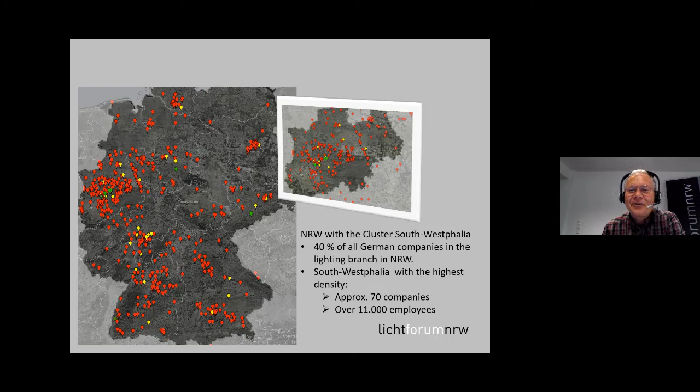So, thanks for the introduction, Arno, and a warm welcome from Lichtforum NRW. We are an initiative founded by regional lighting manufacturers and are based in the region of North Rhine-Westphalia with the highest density of companies working in the lighting branch. Our goal is to support the field wherever necessary, and today I would like to talk about the new regulations, which already produce many questions amongst the companies. As the wording is really very special in German, I'm afraid I cannot guarantee the correct English expressions.

In particular, it is these new regulations which can only be seen jointly. We from Lichtforum NRW would like to assist distributors of lighting products to apply these new regulations and to clarify points requiring deeper understanding. And for this, we initiated a working group consisting of manufacturers and experts to discuss open questions continuously. The regulations deal with both light sources and control gear. In this presentation, allow me to concentrate on light sources and luminaires only.

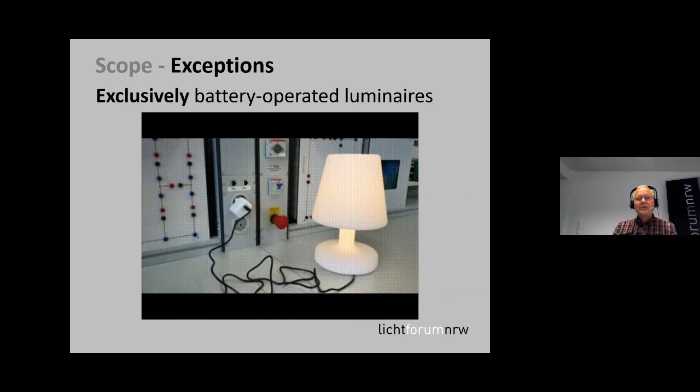Before we clarify what a light source is according to the regulation, let me talk about the exceptions. There is a list of light sources in displays, electronic displays, emergency lighting, solar lighting, bicycle lights, and many other exceptions too. But I would like to point out the case of exclusively battery operated luminaires. Say this table light is equipped with a USB socket for a charging plug. If it can light during charging, its light source falls under the scope of the regulation. But if a built-in switch cuts off the lighting during charging, it would then be considered as an exception.

And we have to get familiar with new terms. The lamp or LED module now is called a light source. I would say that shouldn't be a problem for us all. A bit more complicated is the wording containing product, which actually stands for the luminaire as we know it in the classical way. But nowadays, all sorts of products are equipped with LED, like shower heads, railings, furniture, and so on. And to cover all these new products, the expression containing product was introduced. If I happen to use the word luminaire, I certainly mean containing product.

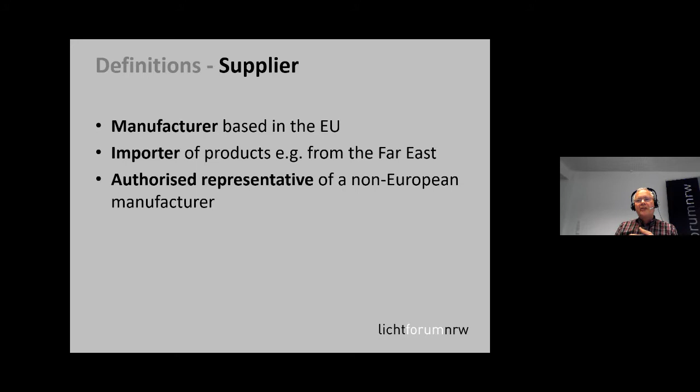If we want to know who is responsible for what, we have to sort out the different actors involved in the whole process, starting from the production to the sale at the end. A supplier, according to the regulation, can be a manufacturer based in the EU or an importer of products, for example, from the Far East, or an authorized representative of a non-European manufacturer who places the products on the EU market

instead. But please remember, placing on the market means making a product available in the EU market for the first time. Importing it alone doesn't mean that it has been placed on the market yet. The retailer is the classical seller. He sells, he markets the product to the end user. Both the supplier and the retailer have to know and follow the requirements of the regulations.

There are 3 deadlines we have to keep in mind. From the 1st of May on, information and parameters of a light source can be entered into the European product database EPREL, so that they are available on September 1st of this year at the latest. It should also be possible to generate energy efficiency labels for the registered light sources from May 1st onwards.

September 1st, 2021 is the most important deadline because that is the day the regulation comes into force with all its consequences. In a nutshell, first, the old energy labels displayed for lamps at the point of sale are to be replaced. Lamps with old labels on the packaging can be sold off. I heard something of a fortnight transition period, but I don't know this for sure. I will have to check this.

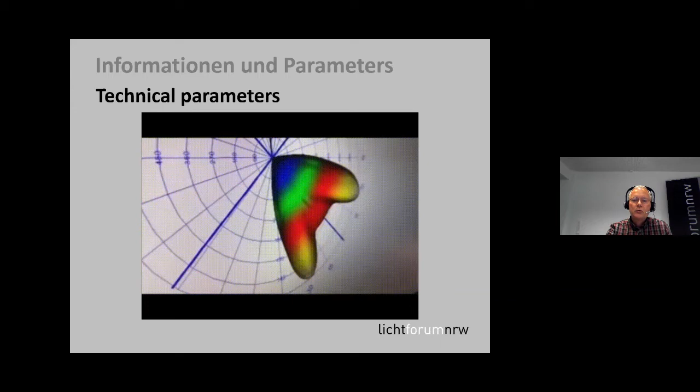For the next slides, I'd like to mention two more definitions. Information means all the notes on functionality and testing, whereas parameters stand for all technical values of a light source. These are different depending on whether we are talking about a containing product or a light source. We from Lichtforum NRW were able to measure these parameters in our own laboratories. So what does the supplier have to observe?

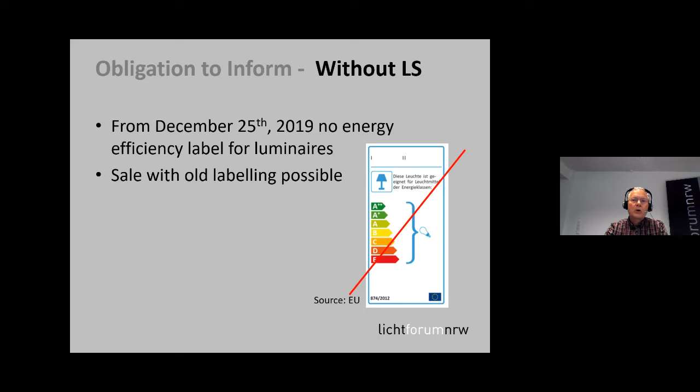As a supplier of luminaires, there are three different major cases with different requirements. Scenario 1. If you place a luminaire without a light source on the market, you can lean back. You have nothing to do with these regulations. From Christmas Day 2019 on, the energy label for luminaires was no longer required. You are allowed to sell off your products with the old label. Scenario 2. You place a luminaire on the market with an exchangeable light source.

Case 1. This light source is already available on the market. Then you only have to refer clearly to this in your technical documentation so that it can be found in EPREL. Case 2. Are you enclosing a light source which hasn't been placed on the market yet? For example, because you import this light source especially only for this luminaire, then you have to register the light source yourself in EPREL.

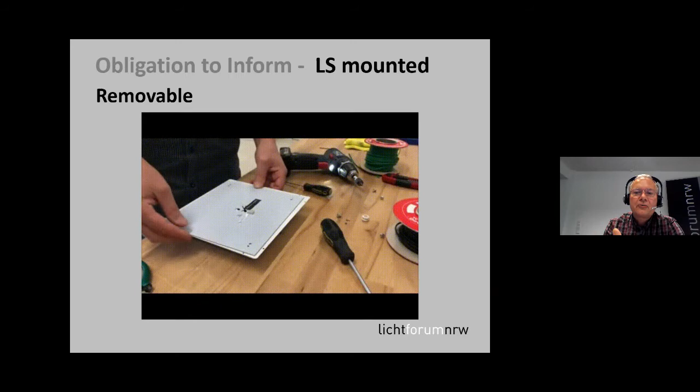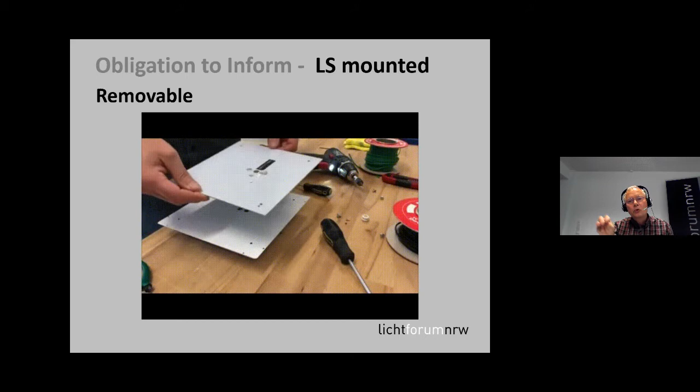Scenario 3, and now it's getting a bit more complicated. If you provide an integrated fixture with a mounted light source, usually LED, there are again two cases with different approaches. Case 1, the light source is removable for verification. This is now very important. This means it can be extracted from the containing product without the light source being damaged. Then it follows the way I mentioned before with the enclosed light source.

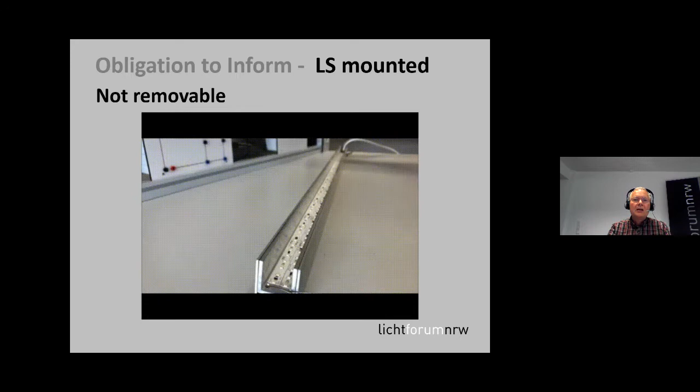Has it already been placed on the market? It has been registered in EPREL, and you only need to refer to this light source in your technical documentation. But are you placing this light source with the luminaire on the market for the first time? It is your task to register it in EPREL. Case 2. The light source is not removable for verification. Then the whole containing product will be regarded as a light source and has to be measured accordingly. This can be quite difficult, for instance, if you have long rails with sealed LED modules.

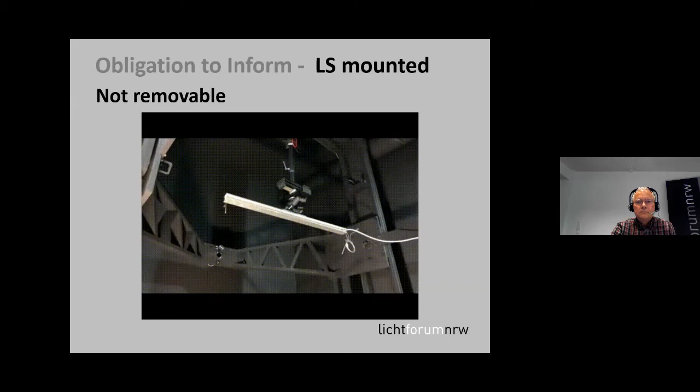But you, as a supplier, can determine the light source yourself. So perhaps the LED module is taped firmly into an aluminium profile, but the profile itself can be removed for verification. Then this profile can be regarded as a light source for a better result, maybe without a cover. If this element is used for different fixtures, it only has to be measured and registered once. And for the technical documentation, you only need to refer to this light source.

We are shifting now from removable to replaceable. Removable, that is what we learned before, means the light source can be removed for verification by the market surveillance without the light source being damaged. Replaceable, on the other hand, means a light source can be replaced by an end user or a qualified person with the use of commonly available tools without damaging the containing product.

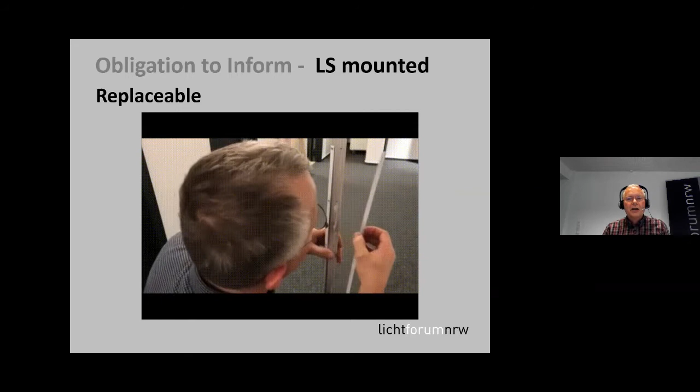So the qualified person is considered to be an electrician or service assistant in the field. But to tell you the truth, this is not particularly mentioned in the regulations. And we understand under commonly available tools everything you can get in a common hardware store, such as spanners, pliers, screwdrivers, and so on. But even a soldering iron you can get in a hardware store. But I wouldn't like to have an end user working with a soldering tool on my product.

To avoid electrical waste, the Ecodesign requirements expect the light sources to be replaceable. But there are certain reasons which may justify a non-replaceability. If, for example, the replacement could reduce the electrical safety, or if the protection against moisture is being harmed, or the thermal management. In this case, some more information has to be provided.

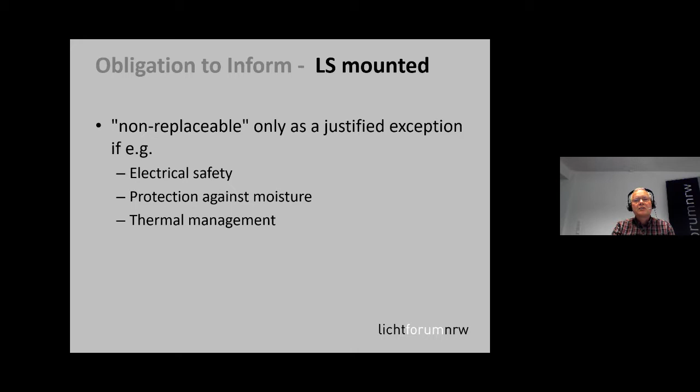So if the light source is not replaceable, the technical documentation has to provide reasons for this, and the website has to inform about the non-replaceability. If it is a consumer product, a B2C product, even the operating instructions must include this information, and the packaging of the luminaire must show at least the pictogram. Suggestions for pictograms are already available, for instance, from Lighting Europe. They are publishing it for a free download.

No matter if replaceable or not, the supplier of a containing product has to provide three kinds of basic information. First of all, information on the light source, which is included in the containing product, and its energy efficiency. This information has to be placed in the technical documentation, and it must be mentioned in the operating instructions by "this product contains a light source of energy efficiency class X." But according to an amendment, I happen to find a new deadline for this. It is the 1st of March 2022.

So if you download the regulation, you will not be sure if it's the latest version, because there are several amendments, corrections, and you have to really check out the website from the EU to find all these bits and pieces. The second basic information for containing products is how the light source can be removed for verification. And the third one is how the light source and the control gear can be separated from the containing product for an adequate recycling after the end of life.

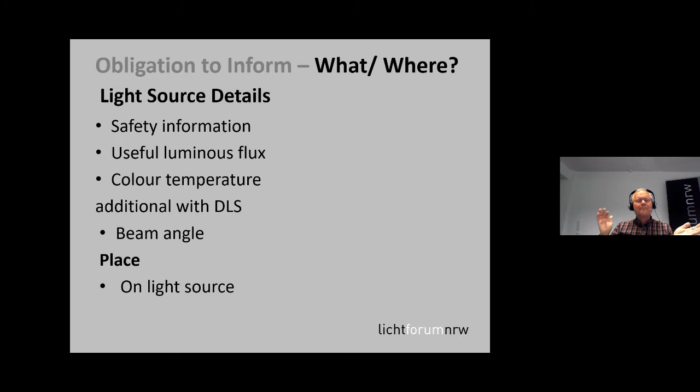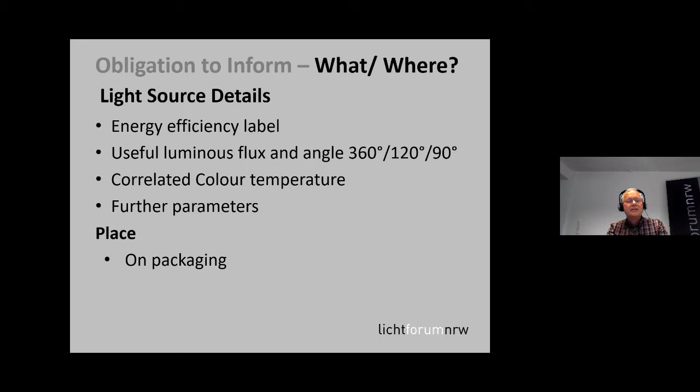So now let's jump from the luminaire to the light source, which itself is being placed on the market. Some information has to be placed directly on the light source itself. And besides necessary safety information, it is needed to mention the useful luminous flux, the color temperature, and additionally with directional light sources, also the beam angle, but all if there is enough space. Should the whole containing product be regarded as a light source, this information has to be displayed somewhere on the containing product. Furthermore, there are many technical parameters which have to be displayed on the light source's package. However, how and where is clearly defined in the regulation.

And now it's time for the retailer to act. Everywhere the light source is being marketed, no matter where, if in printed media, at the point of sale, or on online platforms, the energy efficiency class with its range has to be visible. And in TV spots, this even has to be communicated actively.

Coming now to the actual parameters, what has the supplier got to obey? So is everything that lights a light source according to the regulation? Of course not. Only when these criteria here are met, they fall under the scope. For example, color and output have to be in a specific range. Decorative lamps with an extra low output or professional floodlights could fall out of the scope.

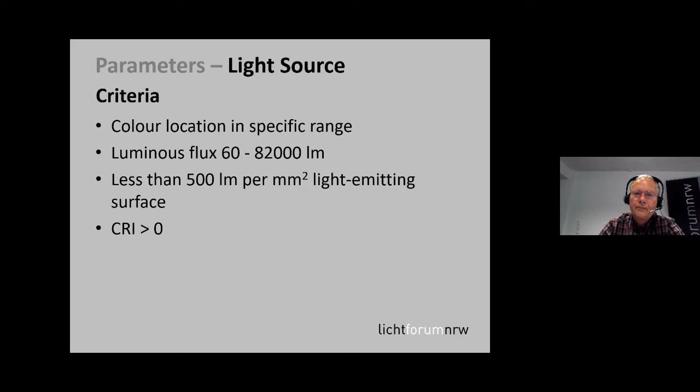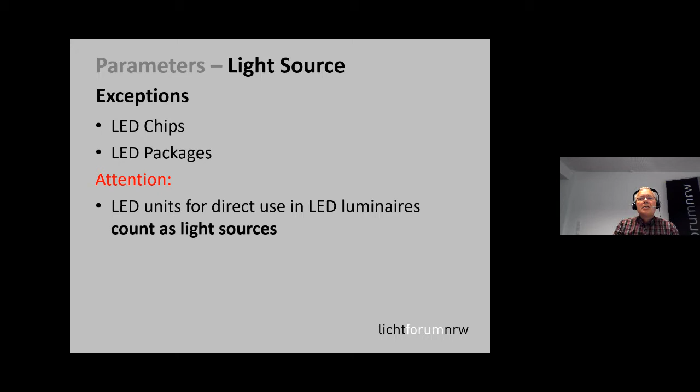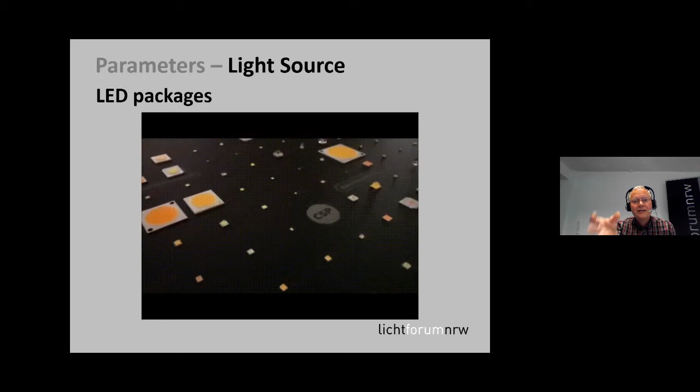And again, we have some exceptions. An LED chip, or so-called LED die, is the semiconductor part of an LED without optical elements or light converters. This is not a light source. An LED package, like a chip on board, normally isn't a light source either. But if this LED package is intended to be used directly in an LED luminaire, say a chip on board clamped down with a suitable device, it will definitely be considered a light source.

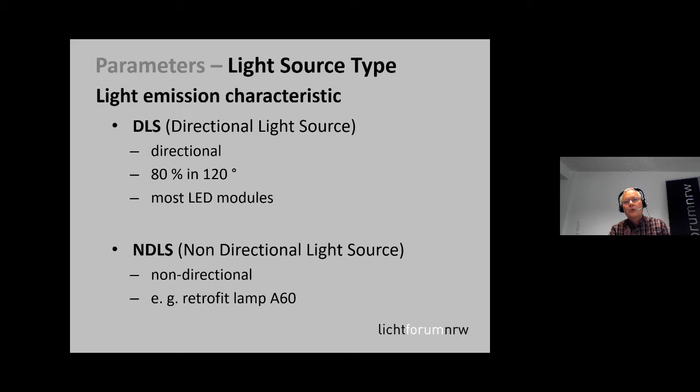The technical parameters depend on the type of light source. First criteria is the beam angle. If at least 80% of the total luminous flux is emitted within an angle of 120 degrees, we are talking about a directional light source, a DLS. This can be a reflector lamp or a flat LED module. Vice versa, everything else is an NDLS, a non-directional light source.

The second criteria is the supply voltage. Is the light source connected directly to the mains? We have a mains light source, MLS. This could be a retrofit lamp or a mains voltage LED module. But if it needs further equipment, such as a separate control gear to operate on the mains, we are talking about an NMLS, a non-mains light source.

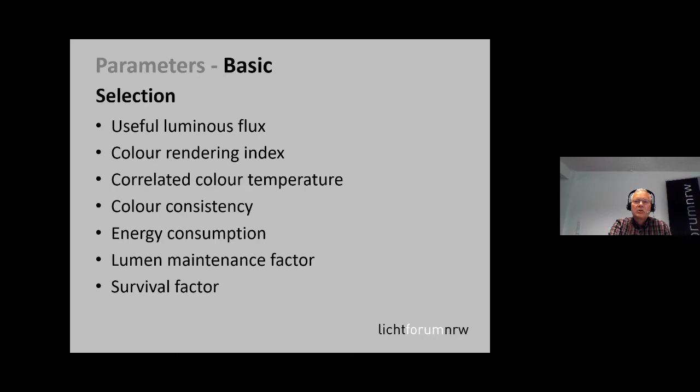There are further types of light sources, and I don't want to go into details here. You only find combinations of these criteria: directional on the mains or not, or non-directional light sources on the mains or not. These are some of the basic technical parameters which the supplier has to provide for his light source.

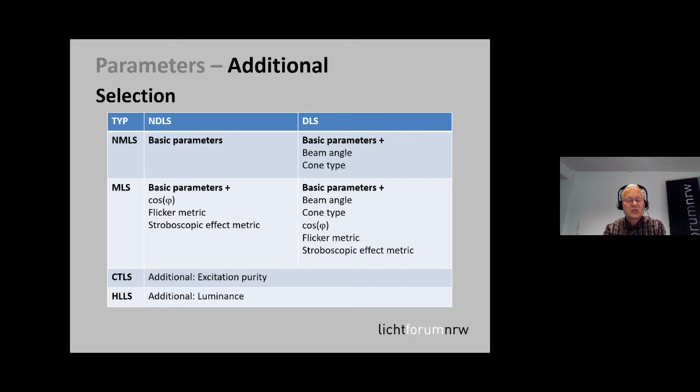Depending on the type of light source, there are additional parameters to be determined. With DLS, the beam angle is extremely important; with MLS, flicker and stroboscopic effects have to be checked. The Ecodesign regulation sets strict minimum requirements for the respective product.

Please be prepared that all of a sudden the market surveillance authorities knock on your door and would like to take a glance through your documentation. They will check all information and parameters the supplier made in the relevant places. It would be quite helpful if you could provide internal or external test reports to confirm your data.

Just remember, to remove a light source for verification, the luminaire, as we understand it, could be damaged as long as the light source keeps undamaged. Long LED modules could be shortened to approximately 50 centimeters or whatever size comes next. If not, it will be tested with the whole length.

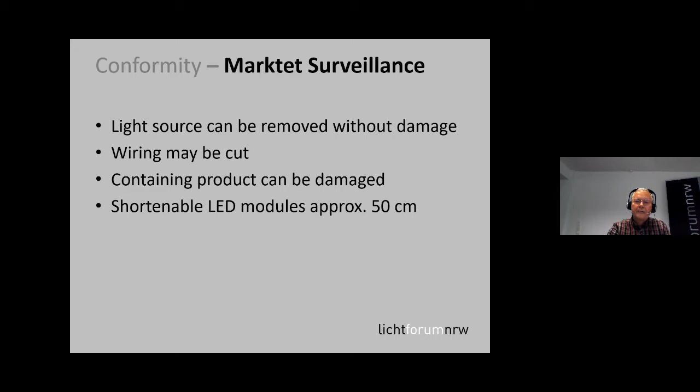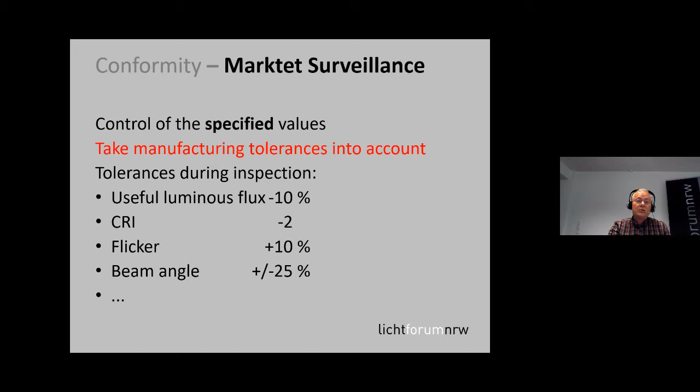The specified values will be checked and they should meet the verified results within a certain range. But if you specify the parameters of your light sources, please take tolerances into account. This could be really crucial. I hope I could give you a short overview. If you need any assistance, our labs and team colleagues are at your disposal. Thank you very much for your attention and stay healthy.

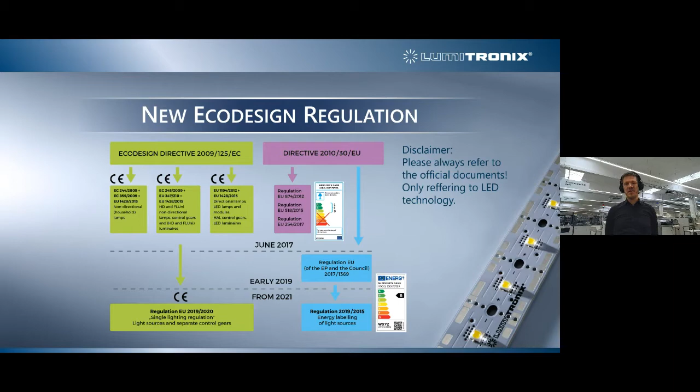So how and where to apply? As Ms. Stockton already said, the single lighting regulation makes things easy for the luminaire manufacturer if you understand how and where to apply it. The single lighting regulation divides between light sources, separate control gears, lighting control parts, and the containing product, which is the actual luminaire. The light sources have very difficult to understand and very deep technical requirements, how they should be developed, how they should be constructed to fulfill the requirements of the single lighting regulation.

And they also need to be labeled, and they need to be placed on the market, and there are a lot of information requirements which I will inform you later. For the separate control gear, there's only CE marking needed, but also quite strong technical requirements, which are difficult to fulfill. For lighting control parts, it is a little more difficult. They should be CE marked, but marketed only together with a light source or separate control gears.

For containing product manufacturers, that might be a luminaire, but that also might be some very different product containing a light source. This regulation makes things easy because you can mark your product only with a remark, this product contains a light source of energy efficiency class, whatever it is.

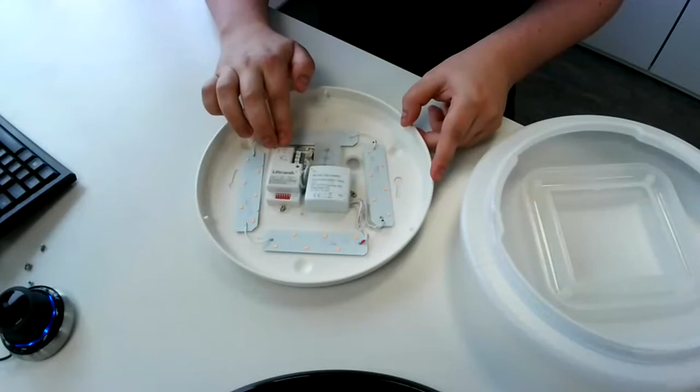This luminaire is a great example on how to differentiate between the separate components. At first, we see this is the whole containing product. We can remove from the containing product 2 separate diffusion layers. After those diffusion layers, we see the remaining components, which are a separate control gear or power supply. The purpose of this is to reduce mains AC voltage down to a lower DC voltage.

Behind the separate control gear is a lighting control. The purpose of the lighting control is to enable functionality like dimming or also smart connectivity. And in the end, there is the light source itself, which will brighten your day. After we have now seen the luminaire and how it is contained in separate components, let me switch back to my presentation.

We have first seen that we have a containing product. The containing product contains a light source, a lighting control part, and a separate control gear. If we apply the old lighting regulation, this product combined has an energy efficiency of 65 lumens per watt and therefore will reach an okayish A in the old energy efficiency class. However, if you apply the new single lighting regulation without any changes, you will get a measly G. Actually, this product is close to not being able to be sold at all.

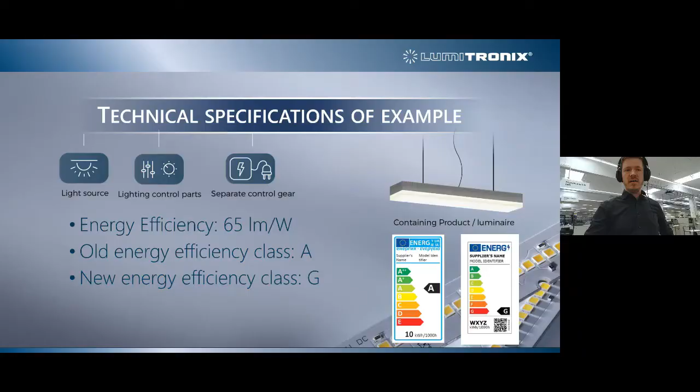Thank you very much for your practical insights. I think it's very important and very good to see these technical specifications. And I will jump into the technical requirements of the energy efficiency of the light source. Just a moment, I have to switch the screen. Okay.

Then there's the loss factor, which differentiates different light source types. But since we are focusing only on LEDs, this is a constant number of 1.5 for LEDs. The useful luminous flux is the luminous flux of the light source, which is within the directivity defined for the light source.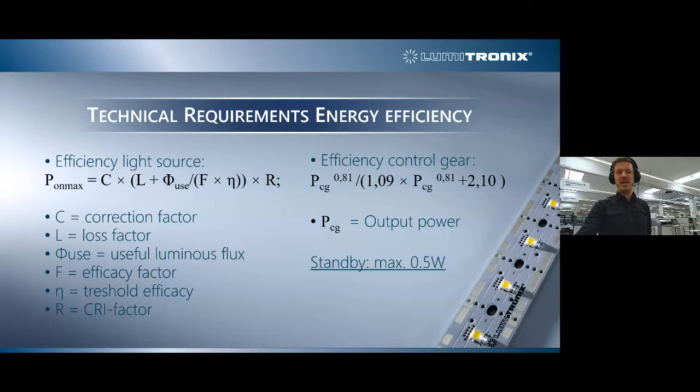Okay, I have stopped at the color consistency, which is measured in MacAdam steps. Also over here, there's a low requirement of 7 MacAdam steps minimum, which needs to be fulfilled, which I think is very easy to fulfill. Then there's also a requirement for flicker and stroboscopic effect, which has to be fulfilled.

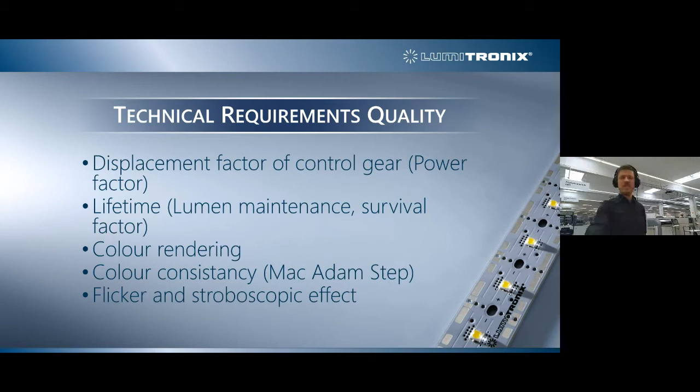What is very important and in my opinion also very difficult to fulfill is the new information requirements, because on the product, that means on the light source itself and also on control gears, there needs to be very specific information. On the packaging, there's a whole bunch of specifications which need to be printed. For control gears, this information also needs to be published on a free access website.

There's a very specific form of your datasheet and technical documentation which you need to fulfill for light sources and also for control gears. And what is quite tricky at the moment is that you'll need to publish all your products, if you're producing a light source, on the European product database, which is not perfectly working at the moment, which makes it a little tricky, but I assume it will be fine within the next weeks or months.

If you are a luminaire manufacturer, then most of these requirements do not interest you at all, because you only need to print on your product, on your luminaire packaging: This product contains a light source of energy efficiency class X. Only control gear producers and producers of light sources have to fulfill all these very difficult technical requirements.

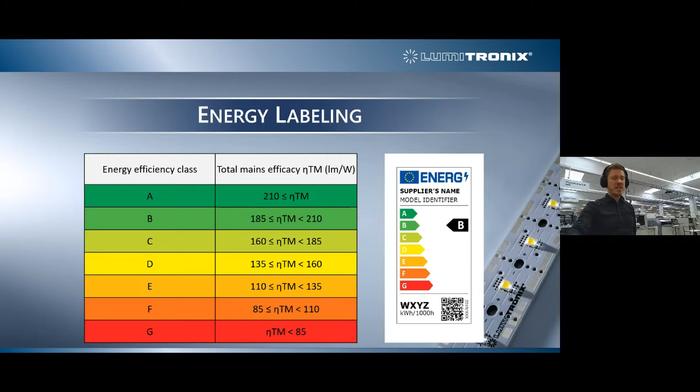Okay, so thank you very much. I'll give over to the practical demonstration of Volker again, and hopefully we'll manage with the presentation better than before. Thank you very much, Paul.

After these technical details, I would like to again show you the luminaire we have taken a closer look at before, and tell you how to specify it in a way where you do not have to declare the whole luminaire, but only the light source in it. As we've seen before, this containing product has two diffusion layers. Both of these diffusion layers will absorb light and therefore will worsen your energy efficiency rating. There's also the separate control gear and the lighting control, which will also worsen your energy efficiency rating.

However, if you take care when designing your luminaire, it is sufficient to just declare the energy efficiency of the containing light source. In order to be able to do this, the light source itself needs to be removable. Removable means that the light source can be extracted by a supervising party in order to make sure it really is as specified. But being able to remove the light source does not mean that everybody has to be able to extract it with a Phillips screwdriver and then place it back. It is totally sufficient if the containing product gets destroyed while removing the light source, as long as the light source itself is not destroyed.

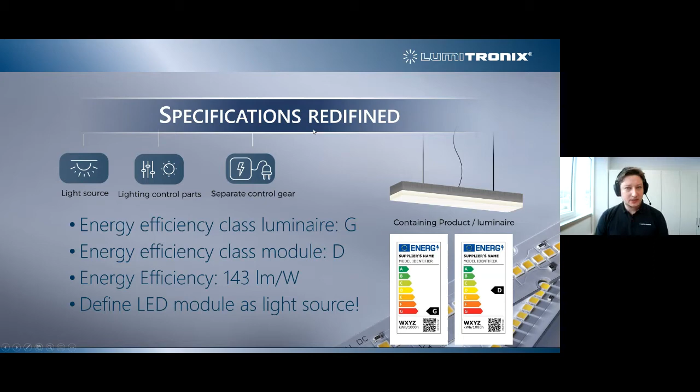But what if you are not satisfied with energy efficiency class D? After all, this webinar is called How to Achieve A. There are a couple of ways to achieve this, and Lumitronix will help you with this. The first step to achieving an energy efficiency class of A is to separate the light source from the surrounding product, as we have seen before. And then you will have to change the LEDs contained in your product.

And with this, it is okay that you add a very efficient 4000 or 5000 Kelvin LED as a second one and define this as the default operation mode, which will be used to specify the energy efficiency class of your containing light source. With these tips at hand, I would like to hand back to Paul.

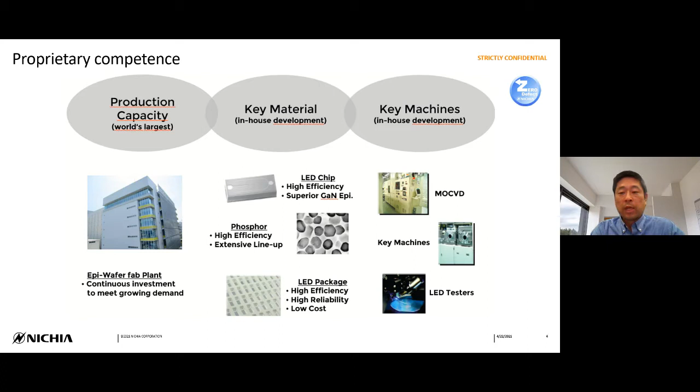Nichia has 3 unique competencies. The first one is the world's largest production capacity. You can see one of our buildings here on the left side. And the second one is in-house developed key materials, such as LED chip, phosphor, and LED package. The third one is in-house developed key machines. This makes Nichia sustainable and a unique position.

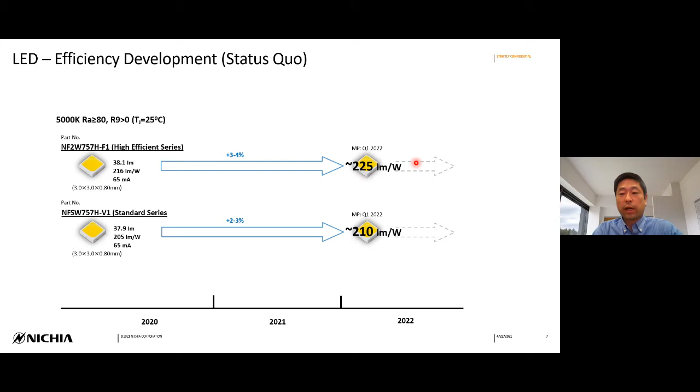Can LED help only efficacy? I do not think so. LED has more capability. LED adoption to the lighting industry began from energy savings here, which is mass replacement of bulbs and fluorescent lamps. Then CSP style LEDs, we call it direct mountable chip, support easier design and create new design.

Then phosphor technology with cutting edge technology supports quality of light, such as high CRI, which I am giving you updates on later. Then Nichia is stepping into human-centric light as the new feature. Healthier life by lighting would create a more ecological world with fewer patients in hospital.

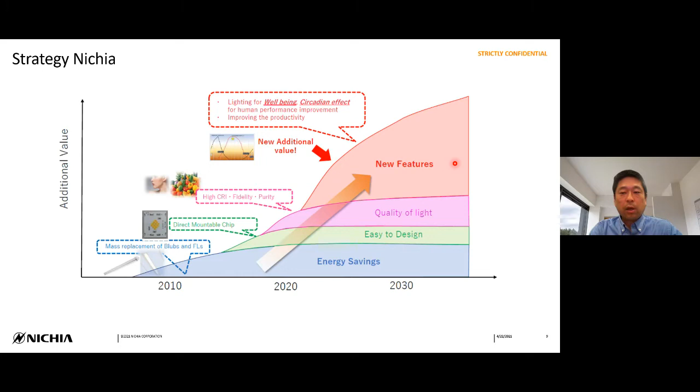But the new H6 LED is changing the game. This new H6 LED has the same efficacy as 80 CRI, besides a superior quality of color rendering index, which is more than 90 CRI. This H6 technology would help Ecodesign and the lighting industry in terms of the very good efficacy and the quality of light.

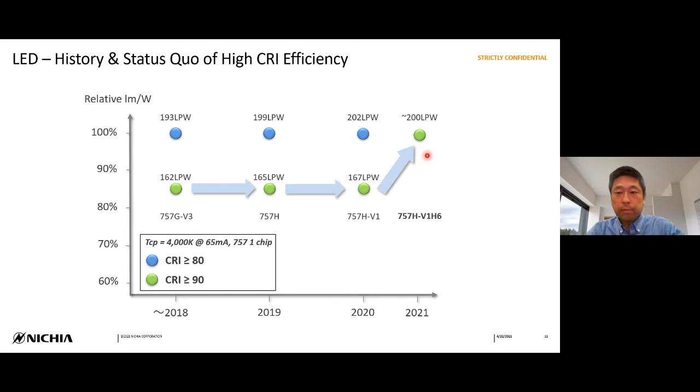Now, we are moving on to how LED can affect the health of humans. White LEDs generally consist of a blue light source with a layer of phosphor on top, and these combine to make white light. They do not usually provide a strong cyan component in their spectrum, because this comes at a cost in terms of luminous efficacy. So this cyan region drops the efficacy. This means standard LEDs struggle to provide truly human-centric solutions that stimulate the human body.

Vitasolis technology enables users to benefit from both the energy savings of LED and the advantage of human-centric lighting. Its rich cyan component gives you vitality, while LED efficacy is still high enough. If you multiply the melanopic ratio, which connects to the cyan components, and the lumens per watt efficacy, Vitasolis comes out on top over conventional LEDs. So Vitasolis is giving you both good efficacy and good melanopic ratio.

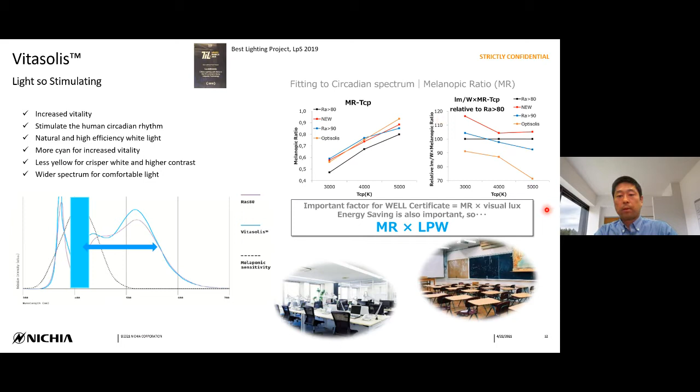This is also another new technology, the innovative 2-in-1 tunable white. Mid-power LED enables luminaire manufacturers to improve color tuning, shrink optics and fixture profiles, while enabling new design options. This is the industry's first tunable white LED in a mid-power 3030 package with a single light emitting surface. Targeting most lighting applications, the technology provides luminaire manufacturers with a host of benefits ranging from new technology and design features to improved factory operations and inventory positions.

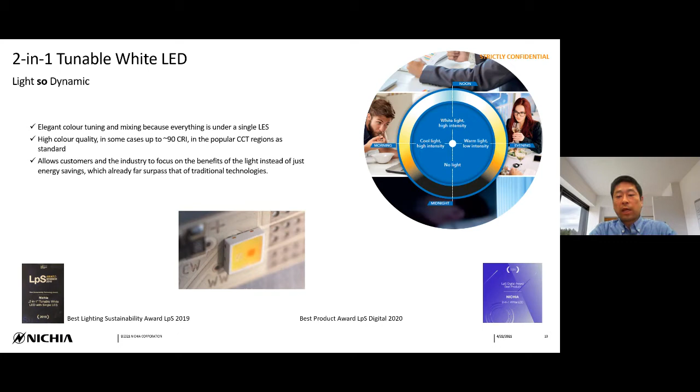Nichia's proprietary 2-in-1 LED technology also allows for higher color quality, in some cases up to 90 CRI in the popular CCT regions as standard, achieved with negligible loss of performance versus standard CRI LEDs. This technology allows customers and the industry to focus on the benefits of the light instead of just energy savings, which already far surpass that of traditional technologies.

This is compared to the traditional LEDs, here, and the new technology, 2-in-1 3030 LEDs. So as you can see, two colors are in one single emission, which can change the style or the size of the fixtures. As you can imagine, these 2-in-1 LEDs allow the reduction of the light guide mixing area here, a shorter optical distance like this, a simplified PCB design like this, and a thinner edge of the fixture that creates a totally smaller size of the luminaires.

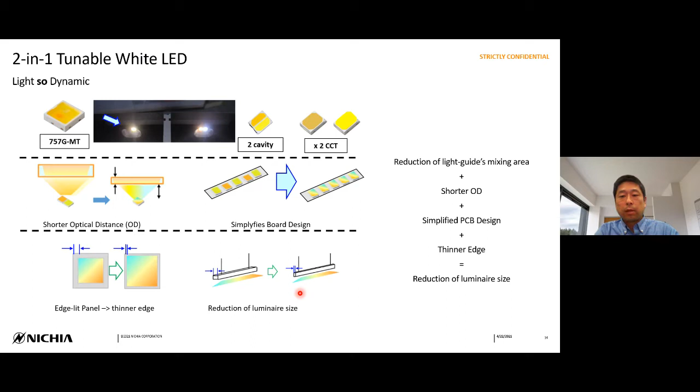So both new technologies, Vitasolis and the 2-in-1 tunable white, are included in Nichia's Light So Good motto. We at Nichia would like to support eco-design and our lighting industry with our unique technologies. Thank you very much.

Thank you, Kai, for your interesting speech and for giving us insight into the options for how Nichia can assist lighting manufacturers with their products in achieving good business.

So the next presenter: it's a joint lecture from the Fraunhofer IBP team, authored by Daniel Neves-Pimenta, Daniel Wehner, and Robert Ilg. This lecture will be presented by Daniel Neves-Pimenta and Daniel Wehner. It's about a holistic approach for dealing with the Ecodesign directive in lighting. The focus is on getting the complexity under control.

Daniel Neves-Pimenta is Product and Business Development Manager, gained experience at Danish architects, was fascinated by the potential of LEDs and therefore worked for renowned companies like Nimbus and XAL. At the Fraunhofer Institute, he researches the future of the lighting industry and mass personalization. Daniel Wehner, also Business Development Manager, graduated from Nuremberg Technology and the University of Stuttgart, holding a doctorate in environmental engineering. He leads the development of data science, product stewardship, and corporate sustainability solutions.

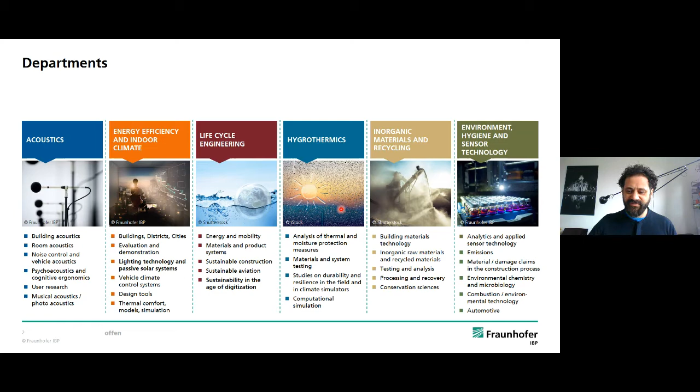So when I was asked to have a contribution to this Ecodesign webinar, we were a bit slow or critical in it, but Paul was like, we need to have some critical appointments on this stuff, and I thought, okay, that might be a good position for us. And on social media, I found this very interesting post that I'm showing here.

So this shows a situation in London from 1851, and you can see some funny objects on the facade, which are there to bring daylight into the building. So this is a small note from a newspaper. No less than 50,000 reflectors of this firm's manufacture have been fixed in London alone, and this was in 1851, so almost 170 years ago. People were really thinking of how to use daylight in buildings.

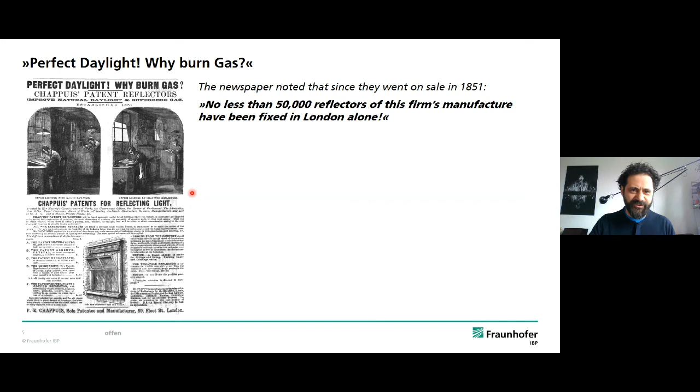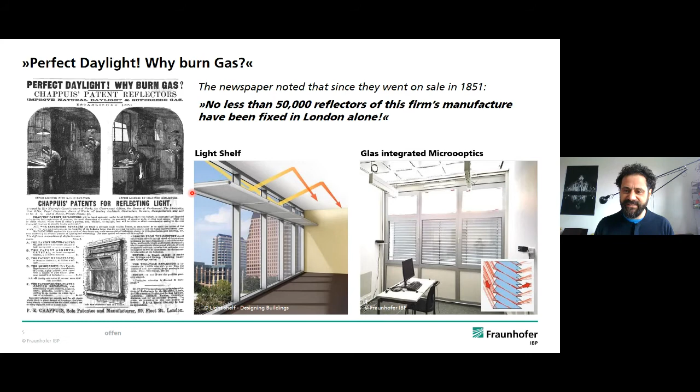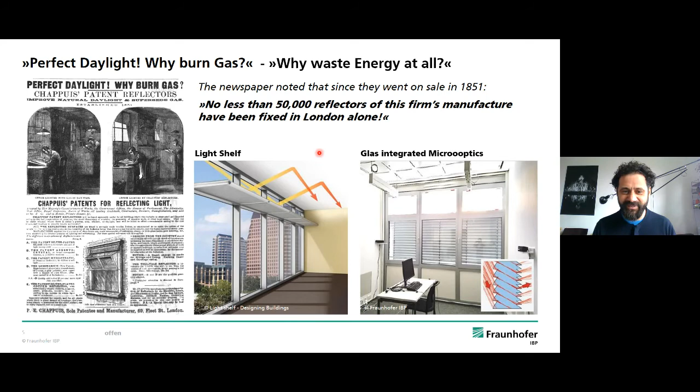I think this is a very nice claim: perfect daylight, why burn gas? So up till now, there are technologies that try to really bring daylighting into the buildings. We are also working on these issues and have mounted these special glasses you see on the right side with some integrated micro-optics to really bring daylight into the room and throw it up to the ceiling to have more usage of the daylight. So if we want to be critical on this, we can say, why waste energy at all if we can have sunlight? Of course, this is hard to integrate into this directive.

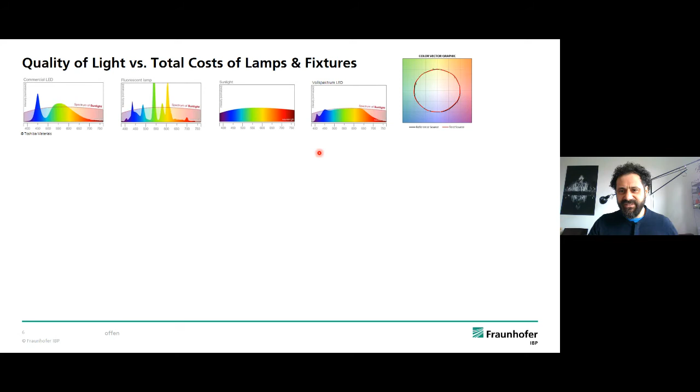Another aspect that Kei-san already mentioned is that this directive is really focusing very strongly on aspects like energy efficacy, of course. But it's not only flicker that is necessary for people. It's also necessary to have a very good spectrum, and not only CRI, but maybe also the gamut and stuff that is also happening at the moment. But this directive is really focusing on the hard facts.

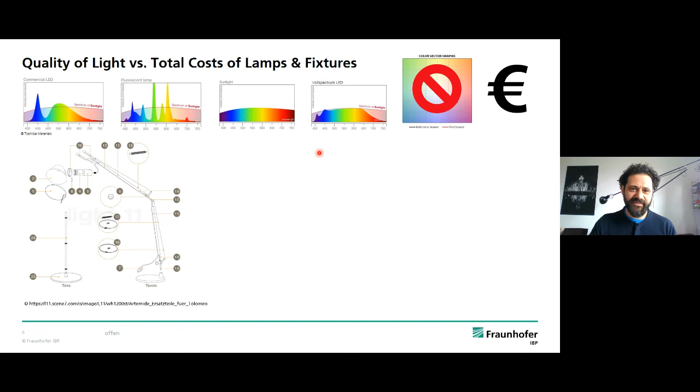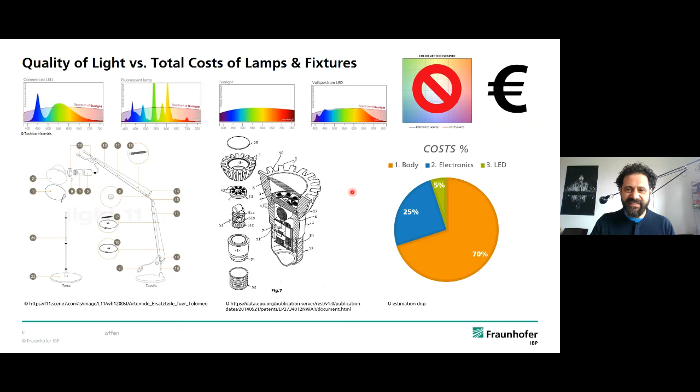Usually when it comes to fixtures, it's always a price issue. And if we take a look at the total cost of lamps and fixtures, there are many body parts, there are many complex parts, there's electronics and stuff. So I might say, as a small estimation, less than 5% maybe are really the costs that go into the LED. So it's a bit ridiculous to be always focusing on aspects like money and energy if we really have many more aspects to cover.

Of course, the energy label is focusing on energy, and this is a right thing to do, because these are some numbers from Repro-Light. We see that the consumption is really 99% in the use phase of the fixtures. So the production phase also is using a bit of energy, but we see that if we run the fixtures, that is where the energy really goes. So it's necessary to take a look at that.

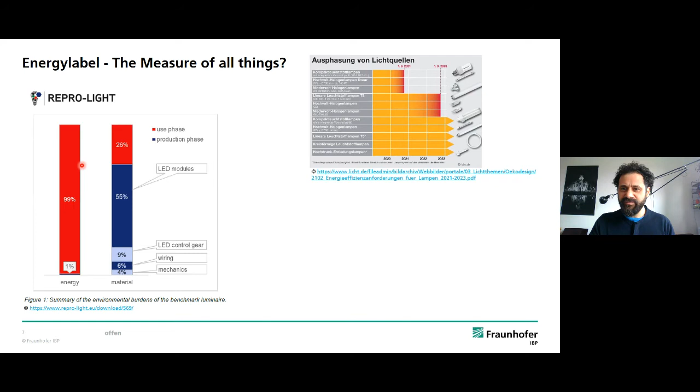Also, we are happy that some of the older technologies are slowly being phased out. This may be hard for some designer fixtures, but maybe there will be some retrofits to allow them to light. We already had a view on the energy label. We also think this is maybe bringing a bit of confusion to the customers. It's really hard already for the fixture manufacturers to know if they should put the label on their fixture or on the lighting engine and stuff. But maybe the next generation will understand it.

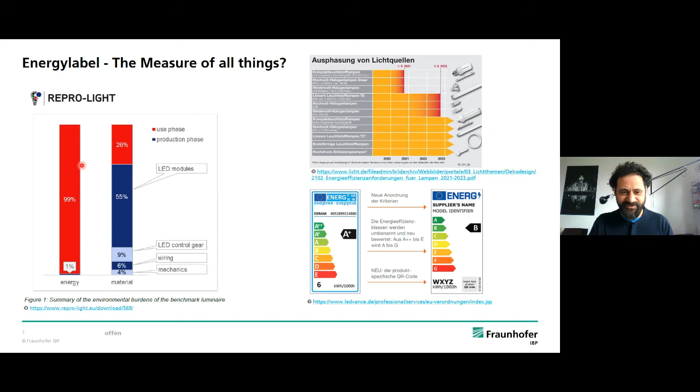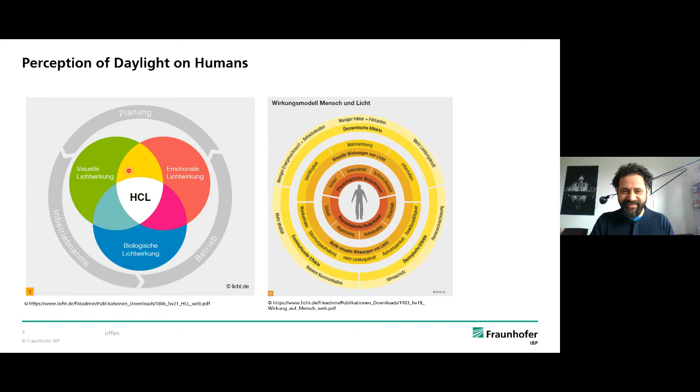Another aspect that is a bit weak: as Kai Haraguchi already said, the perception of daylight on humans, or even the perception of artificial lighting, is growing strong. So visual and emotional and also biological aspects are not addressed in the directive. And we know that it's not only physical, but also psychological aspects that lighting brings to us. And although there might not be the final proof, I think everyone can agree that lighting is very important to all this stuff.

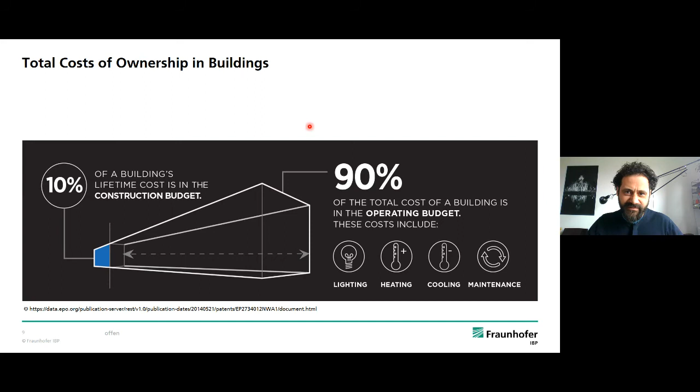So back to total cost of ownership in buildings. This figure, maybe people might know it. So 10% of building costs are in the construction, and then 90% of the costs are really in the operation of the building. And this is right, and I think this is also the aspect where the energy directive tries to help.

But there's one more thing, because there are users inside the building, and these users are, let's say, the main personnel or the main cost aspect. And if we do not look at this, you see these numbers here: they show that almost 100% after 30 years of the building are personnel costs and the salaries of the people.

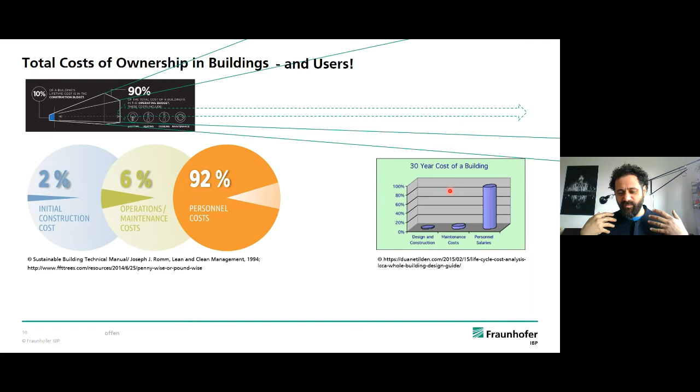And if we do not look at this efficacy there, if people are not working well, they might lose much more energy and bring a really worse efficacy. And we also think that this directive is quite a complex thing to do, and all the lighting companies, fixture companies are striving to bring it to life.

And this is where we are trying to bring some help in the next slides. And this is where we'll pass over to Daniel Wehner to give his view on a holistic eco-design approach, which is required.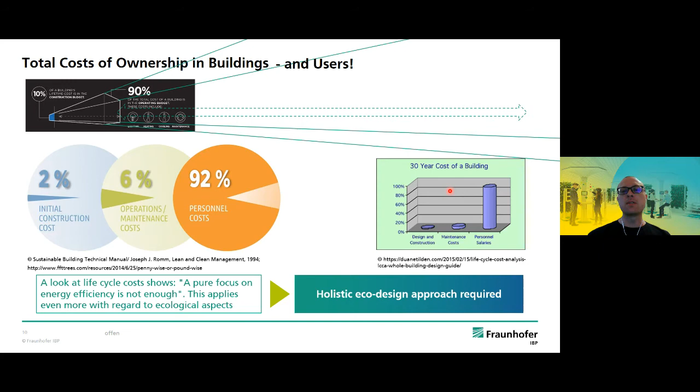Okay, thank you, Daniel, for your very interesting insight into life cycle costs of lighting. And on the next slide, we will see that as for the costs, also sustainability is about a whole lot more than just energy efficiency in use. In fact, really a lot more, so much that at the first glance, it might seem overwhelmingly complex, especially if you look at all these indicators that are around and have to commonly comply with.

There are many indicators, not only regarding different effects you have on the environment, like global warming, water depletion, or biodiversity loss. Also, each of these indicators has different computational models behind it and methods you would have to follow. And if you're a bit familiar with this topic, you will also know there are different scopes that are sometimes required from you to deliver, like cradle to gate or cradle to grave or scope 1, 2, 3. If you know these terms, then you also know very often it is not only about what happens in your company, but also what happens outside in your supply chain or downstream at the users of your products, or even at the end of life.

And sure, it's understandable if you say, already this Ecodesign directive is so difficult to get your head around at the moment. You don't really see a way to go beyond this scope right now. But we think you should really ask yourself whether you want to continue to muddle through and be overwhelmed by the next environmental regulation you are most likely going to face in the future. Many of these regulations are already around. Maybe you don't have to comply with them now, but it is very likely you will have to comply with more life cycle related regulations in the future.

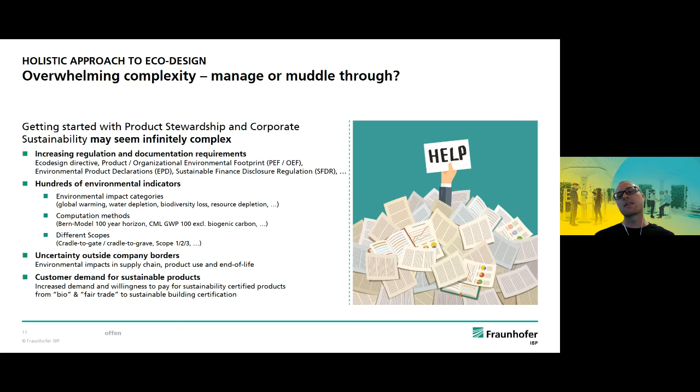Or do you really want to take this as a starting point and follow a more holistic approach to product stewardship and corporate sustainability, and tap also into the value of sustainability, become a leader in the field, and make a profit out of it? And the good news on the next slide is that it's actually easier than you may think to get started with a holistic eco-design approach, as you can benefit from the experience and lessons learned from many thousand companies all around the world in the last decades, where we can clearly see that basically it is about 3 key capacities you need to build up in order to have a solid, robust eco-design approach.

First, of course, we also heard about this a lot today. You need to understand your stakeholders, which are most of all the users of your light. It needs to suit them, but your stakeholders are for sure also the legislators, your investors, and some more you need to take into account. So this is, I think, very basic for any great product. If it comes to capacity to comply with today's and future regulations, then life cycle assessment capacity will be a very important pillar of your portfolio in terms of competence to run such analysis, as well as the data you need for it.

This is important for you in two ways. On the one hand, with having the data and the methods at hand, you will be ready to compute all the different environmental indicators that you will probably have to comply with in the future. And on the other hand, understanding the environmental hotspots around the life cycle of your products will give you a very good understanding where the problems are and where probably new technical regulations will be enforced in the future, because legislators usually also back up their decisions with such life cycle analysis.

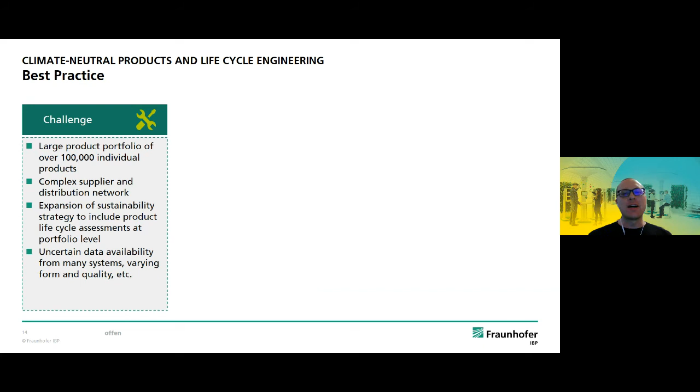Thanks, Daniel. You can see how a typical approach looks like. You can just open the whole slide to the three pillars, Daniel. We don't need to go too much into detail of this kind of project collaboration. I only want to point out a few things.

It's very common for us that we have to work with a very large product portfolio, sometimes with more than 100,000 different individual products. And we're also used to the database, the in-house data you have about your products, being incomplete with regard to life cycle assessment. This is not so much a problem for us. In order to keep things lean, you and we want to work with what is at hand and try not to go into extra data collection, because if you do it now, in the future you will have to do it again, and that will cause a lot of effort you would want to avoid.

On the other hand, with the experience we have from hundreds of different projects in different industries, we usually can figure out quite well which of your data gaps are actually important. And if we find an important data gap, we usually also have experience and data behind to at least narrow down the uncertainty and still get to robust results.

As a result, you can get insights about your product portfolio. But if you want to go further, we also provide automated workflows, components for automated workflows, or simple to use dashboard tools tailored to specific tasks and roles in your company.

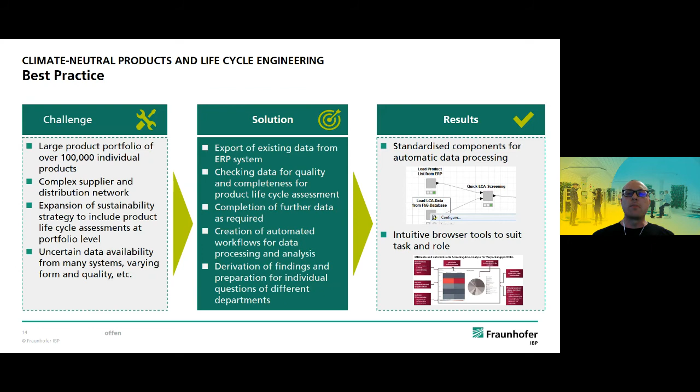Last but not least, I want to welcome you to get in touch with us and benefit from our interdisciplinary expertise for holistic eco-design in lighting. I think a major benefit is that we do not only have experts in sustainability and data engineering, but also have technical experts in lighting in our institute. So this would guarantee a very smooth and effective cooperation,

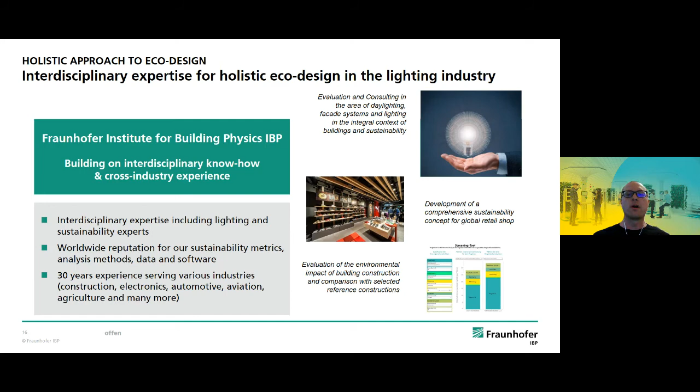regardless if it is a technical optimization project you would be looking for, for example finding integrated solutions for artificial and daylight use, or whether it's more about taking a customer focus and optimizing the user experience through lighting in a shop, for example, or whether it is to build up product stewardship capacity in your company. And with this, I would like to say thank you to all of you for joining our presentation. I'd be very happy to hear from you and maybe get in touch after this webinar. Thank you.

Thank you, Daniel and Robert. I appreciate you for reminding us that while very important, the new Ecodesign directive is just one piece of the complex puzzle of LCA and product stewardship that challenges manufacturers, and especially thank you for giving the perspective on how to turn such challenges into a benefit.

Now we will come to our last lecture, and this will complete the picture on the new Ecodesign directive. Mario Plenek, product developer at Nimbus, joined the company in 2019. Before, he worked as technical advisor for controls and functional requirements for artificial lighting and daylighting, with a focus on IoT and human-centric lighting at Cardiff Engineers. He gained his master's degree at the Lighting Institute of the Karlsruhe Institute of Technology, where he also worked as a scientist. Mario Plenek's presentation, Exploring Ecodesign, Single Lighting Regulation, Implementations as Manufacturer, addresses the challenges for manufacturers from technical documentation to communication with clients. Mario, please, I will hand over.

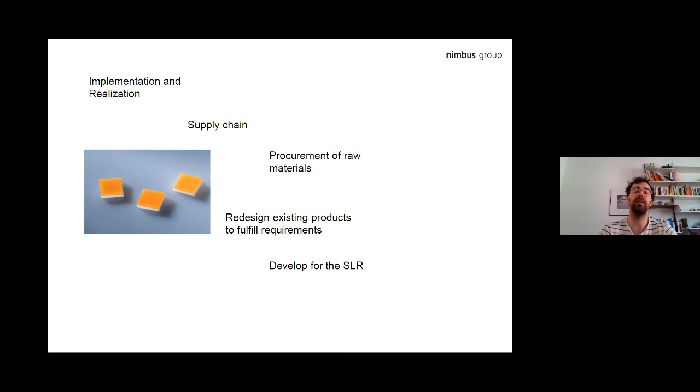It's a little bit easier for new products, because there we have the opportunity to develop more in line with the single lighting regulation. For example, are we going to screw something, put a rivet somewhere, or glue something? What are the possibilities to design our luminaire as simply as possible, and construct it so that you can extract the light source from the luminaire with common tools?

Another part that's quite tricky for us right now is the technical documentation, because we need to clarify for the European Union and the market surveillance which part of our luminaire is the light source. So for each luminaire we sell, we need to make an explosion drawing and an explanation, like a manual, on how to extract the light source from our luminaire. This is a massive requirement of time.

We have manufacturing instructions, but these are only for internal use. I'm in a lot of contact with the market surveillance right now, because they still don't know if a manufacturing instruction is okay for a manual for replacing and extracting the light source, because it definitely shows how you need to put together the light source and also how to extract it again.

It's also tricky for us as a manufacturer, because there's a lot of internal information we need to put on a database. In the end, the manual for the replacement and extraction of the light source is in the private part, so only the market surveillance can see it. But even so, it's still on the internet, it's still somewhere. There are a lot of parts in the online business, and you don't know if somehow this information can leak out of the database.

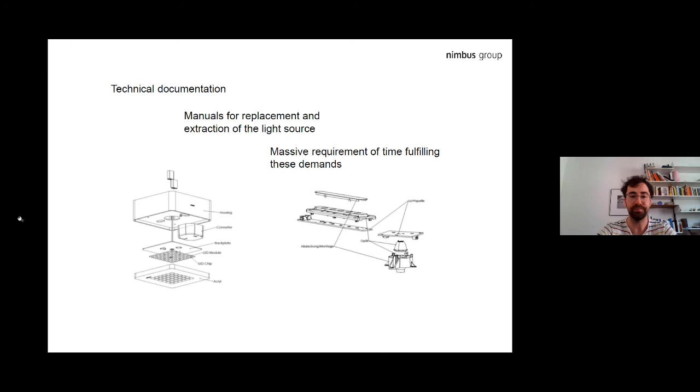So there are a lot of concerns about it. The next thing is the market surveillance. What does the market surveillance do? In the end, it's not really a competitor or something we're afraid of, but more like - okay, how do we need to handle them? Can we see them more as a friend or more as a kind of police?

But all in all, the market surveillance is able to get luminaires from a retailer for testing, and the regulation says the market surveillance must test 10 luminaires. So if you're a manufacturer selling luminaires that are quite expensive, you are very fast in a couple of thousand euros. I had a webinar with the market surveillance a couple of days ago, and the market surveillance is able to get the luminaires from a retailer without paying for it. They just take them, make the measurements, disassemble, reassemble, and give them back to the retailer.

All in all, the luminaires shouldn't break or get destroyed, because we made the instructions on how to extract the light source from the luminaire, so nothing should be destroyed. But even then, if they give them back to the retailer, they are no longer originally packed. So what happens if after 2-3 years our retailer says, sorry, we cannot sell them anymore because the customer doesn't want them since they're not originally packed? Who is going to pay for it? Or maybe the market surveillance is not able to reassemble them correctly, and then we have a problem. So what now - who's going to pay for it, and who's in charge of the whole process?